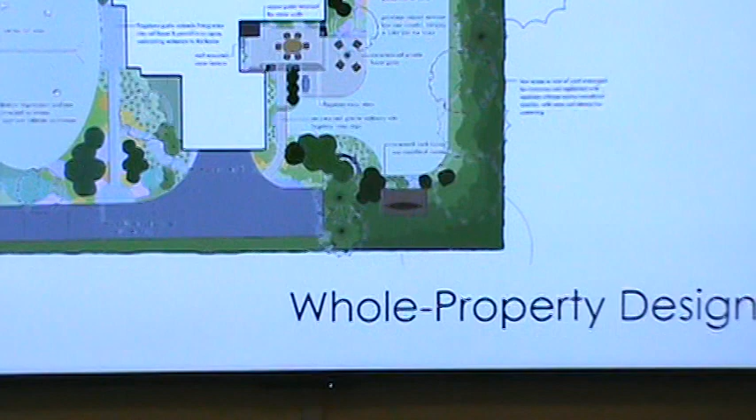So what might landscape design look like? It can look like a lot of things. Almost all of these are examples of my own work, because it felt like cheating to include other people's work.

It might be whole property design. This is a client of mine, a young family who had just moved into this property and it wasn't working for them. The previous owners had a landscape that worked for their needs, so we took a look at the whole property holistically. For this family, it was about managing stormwater, creating spaces for the kids to play, and making a space that was colorful and fit their personalities better.

Landscape design might be small project design. In this case, I was just looking at the front yard. I don't even think I stepped into these people's backyard, because the front yard was what they needed help with. They felt like they had the backyard under control.

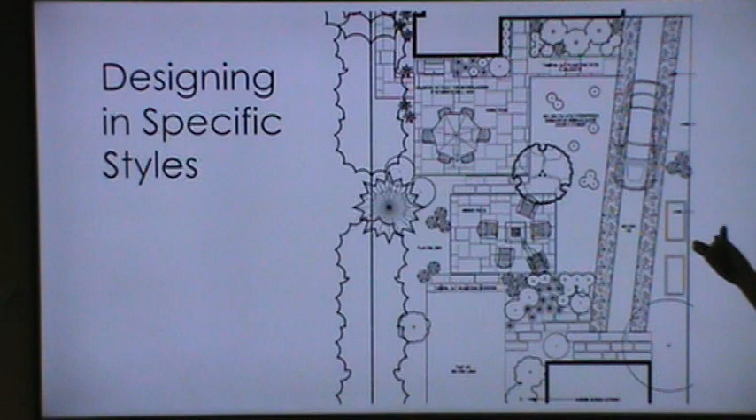It might be designing in a really specific style. I've gotten to work on projects that are more like a cottage garden, and I've also worked on some that are super modern, with diagonal lines and modern hardscape.

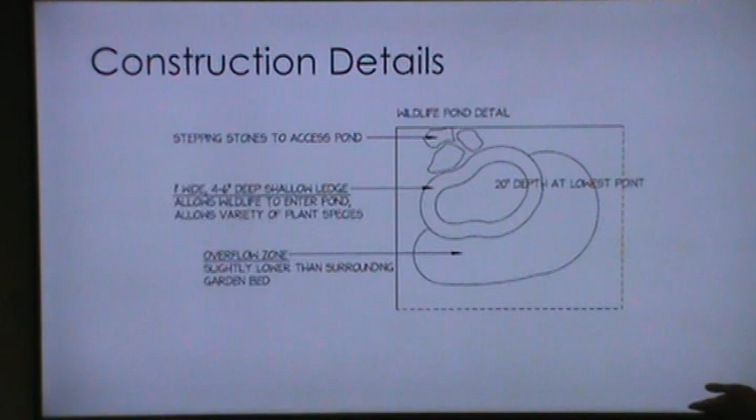It might be construction details. One of my clients wanted a wildlife pond, and I said, I think I can design that. So this was a super simple detail I put together so they could work on it themselves.

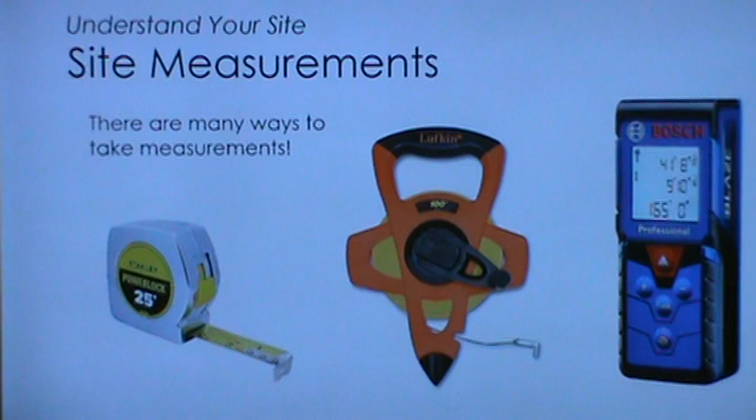So again, we're still in the process of understanding our site - taking site measurements. I wanted to talk about how you might do this as a professional versus as a homeowner. I go out and use a nifty little laser, which you can buy at Home Depot if you want one - I love it. But you can also just use the tape measure you got in your garage, just measure out the house. You could use a 100-foot tape measure. I use a wheel.

I also have other tools from a professional perspective - I have a handheld GPS unit for marking out irregular shapes, and a portable altimeter for taking grades, so I can see it's a 20 inch drop from the patio to the corner of the yard. But a lot of this you can do DIY, even understanding grades - there are ways to do that. I could get into it, but look it up on YouTube, there's tons of information out there. So, site measurements - this is me.

Figure yourself out. Using graph paper or notebook paper with lines can be really helpful if you're doing a building, to keep your lines straight. A lot of times I'll sketch in one color and write my measurements in another. I didn't do it here, so it's a bad example.

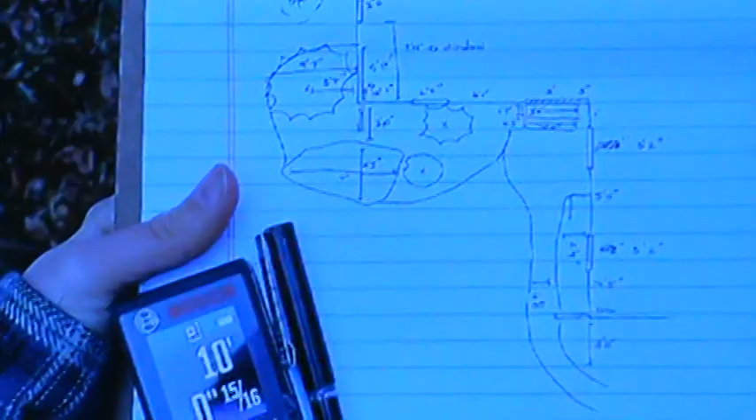But again, it's sort of, I start at a corner and I measure - all right, it's 3 feet 11 inches from the corner of the path to the house, and then it's 4 feet to the window - and you just start to put in these measurements. And then you develop your base map.

A lot of designers are going to use something like a CAD program, so computer-aided drafting, like AutoCAD or a similar program. There's an inexpensive web-based CAD program you could use as a homeowner if you really wanted to get into that.

Or you can do it by hand, the old-fashioned way, which is the way that I learned it initially, using a scale. Again, this could be a whole lecture just on understanding scales and plans.

There are some common scales, so you're normally going to be in an architectural scale or an engineer scale. Architectural scale is usually a lot smaller, so that might be an inch is 4 feet, versus an engineer scale, which is in increments of 10. It could be up to, I'm sure, 1 inch is 200 feet, or 1 inch is a mile. A lot of times you'll see 1 inch being 20 feet, 50 feet, or 60 feet.

Again, YouTube - I asked my boyfriend actually, I was like, have you ever checked on YouTube for that? And he's like, it's on YouTube. Somebody's explaining this to you.

And then these structures that you outline become really useful reference points. Normally I'll do the house first and use that. And then from there I can start to locate trees using those angles and those points that I've created.

And now that we have this, we can think about our whole site spatially. Ideally, you've marked out the whole site, which might be a combination of measurements and using something like an aerial view.

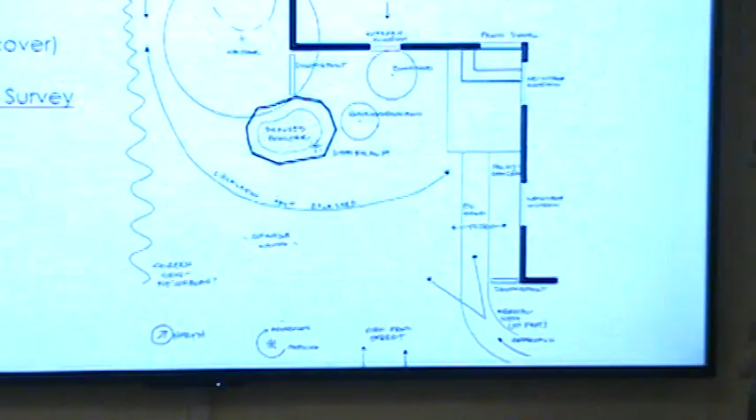Circulation, how do you move around the property? So in my case, I park over here, and I walk down this little walkway, and I go into my house. I also, if I want to go in from the backyard, go around this way. If I'm working in the garden, I'm going around this way.

Views is another thing you might be looking at. So views from the house out, views into your house? What does it look like as you approach your property? What does it look like as you sit in your favorite spot? What do you love about that? Again, could talk about this forever.

Now that we've understood our site a little better, we want to understand our user. This is something you can do for yourself, and something I do for my clients. So I start to ask about 1,000,001 questions. Who uses the site? How do they use it? What do they like to do? What's important to them? What are their values? What do they want to see? What do they want to change? You might not even have answers to all of these questions, but starting to investigate that can give you a lot of information.

So for my own space, following my own process, I wanted a safe approach to the house, light at night because my neighborhood doesn't have street lights, native plants because I love them, framing the front door and giving an attractive approach, managing stormwater in my side yard. It's not too bad, but it gets a little wet, and then maintaining good views in and out of the windows.

I have another question. Sure. You've mentioned stormwater a bunch of times. I'm not exactly sure what that means. I've never thought about stormwater. Thank you. Again, I feel like a lot of times it feels jargony, but it's all actually easy to understand, I promise.

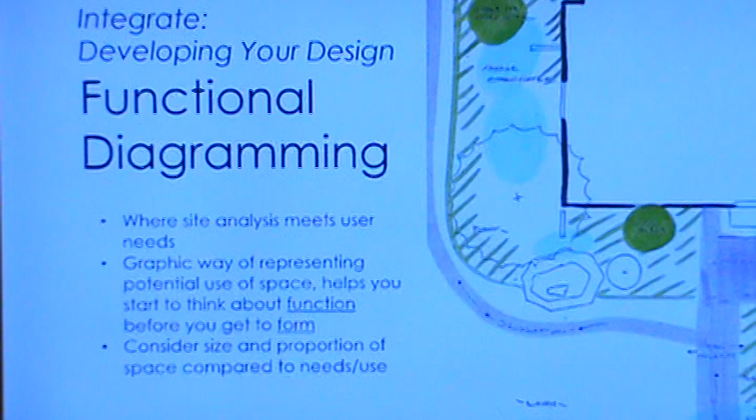How wide does this walkway need to be? Where do I need to be able to walk and access? How much space do I need for entertaining? Does that match the scale of the house? You can think of indoor and outdoor spaces as being analogous. You wouldn't want to build a patio that's much smaller than your dining room if you plan on eating out there. So just starting to think about space.

So once you've done your functional diagramming, usually you'll do a couple different versions and think about things a few ways. That's when you develop a concept design, which I've described as the importance of divergent thinking, iteration, and looking at something with fresh eyes. So this is when you're still in the exploring phase. I'm looking at different ways of solving a problem, because there's never going to be one single way, and there's going to be different ways for every person.

There might be one solution that solves three of your issues and one that only solves two. There might be one thing that's really important to you and one thing that's a little less important. So exploring is really important. I always think of this as a time to think really quickly and creatively. Don't overdevelop a single idea.

Sometimes it's turning the plan upside down. Sometimes it's thinking, what if there was no budget? Sometimes it's thinking, what if that big giant tree in the front yard wasn't there? What if I moved the driveway entirely? This is the time to think creatively. It gives you a lot of really good ideas.

Ask yourself questions. Why do I think this is a good idea? And I actually have an example of that, and why it's so important to think really creatively during this process. And I'm going to take a sip of water, otherwise I'm going to forget.

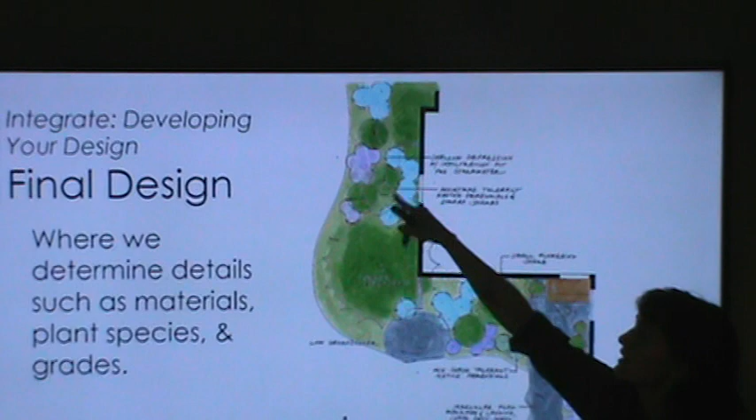This property is pretty shady, so I can't put in a full sun perennial. It's not going to be happy there, it's not going to do well. In this case, going back to stormwater, routing that downspout into a rain garden could be a really good solution.

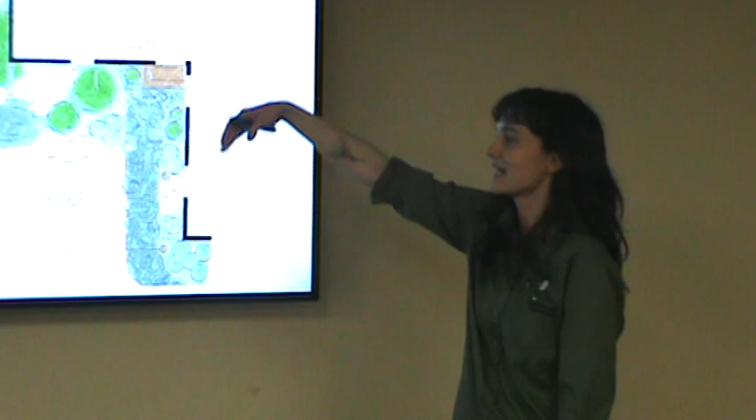So you see it starts to reach a certain level of detail, and at this point it's still on paper. If I change my mind or explore this a little more before it goes in the ground, I can still make changes. This document becomes part of my management of the space. This is what I'm heading toward - maybe I'll do the pathway one year, the front planting the next year, and something else the year after. So it becomes this tool for me to use.

I showed my partner this presentation, and he said, that was a lot of information, Olivia. And I said, I bet these guys will be thinking that too.

So I wanted to talk a little more toward people who are thinking about designing their own landscape. Maybe you saw that and thought, I should change my career right now and become a landscape designer, I want to learn more about that. Or maybe you thought, oh my God, I don't want to deal with the stormwater in my yard, I think I might have to hire a professional. So I want to talk to both of those potentials and figure out how they might work together.

If you're interested in residential landscape design, whether as a homeowner who wants to do it yourself or working with a professional, I brought some books with me. I actually stole this one from one of my professors by accident - sorry, Jules. This is, to me and a lot of people, the landscape design Bible: Residential Landscape Architecture.

This book is about the design process - it runs you through site analysis, working with a client, different projects. I think it's a great place to start, even if you just flip through it or look at the pictures, whether you're working with a designer or want to be one yourself. I also included a couple other books, and I have a handout with more resources. Planting in a Post-Wild World is a well-loved copy, you can see it's sun-damaged. This is a really awesome one if you want to think about planting design and what sustainable planting design looks like. I have handouts for everybody with more information.